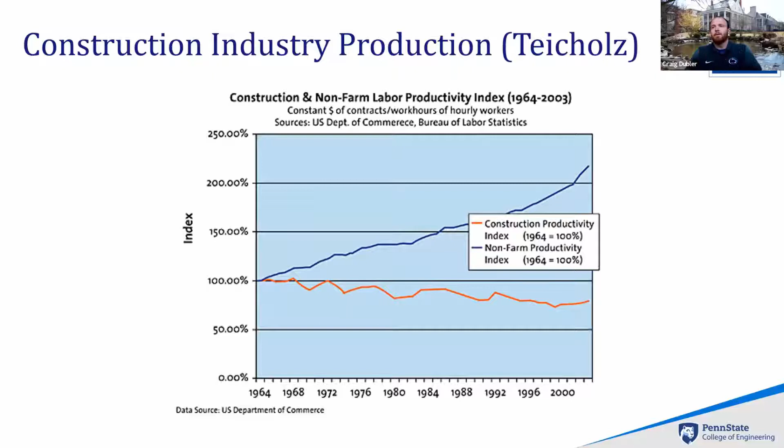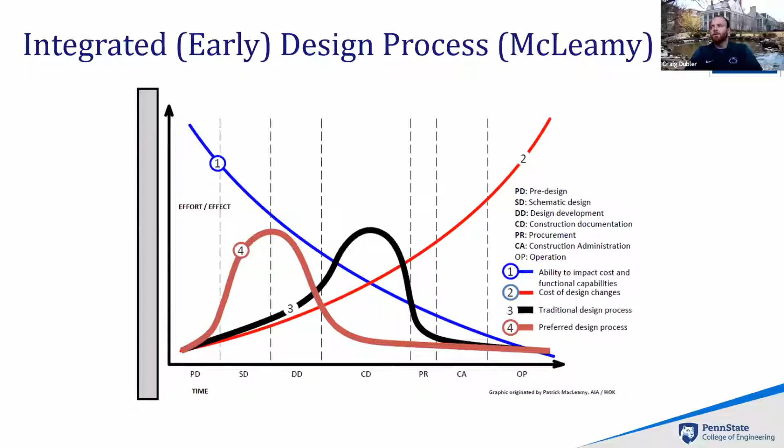So the final study I just want to chat about is NIST in 2004. They talked about the cost of interoperability, or just not sharing information on our projects. And that cost the industry an exorbitant amount of money, just us being siloed. This has really led to a lot of BIM research. I know at Penn State, we were able to get a pretty decent grant helping to try to solve this problem with interoperability, from the BIM execution planning guide.

At the same time, how can we do it from a Penn State owner perspective? So what is BIM for facility owners? I'm going to put my owner hat on. At Penn State, if I'm getting a project delivered to me, what do I expect? And believe it or not, I don't care a lot about the models.

Only where it adds value. So BIM to me is information management. How can I get the information I need to continue being successful in facilities, or maybe look at increasing my options, my interoperability, or information that is available to me, and take advantage of it. So what types of information are available to me as a facility manager slash owner?

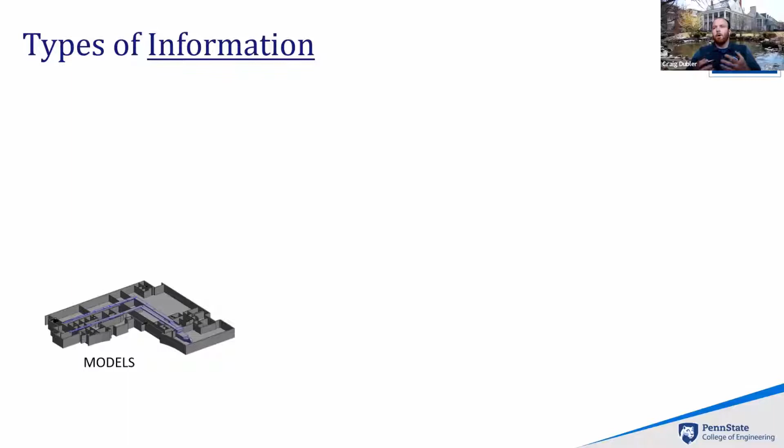Well, there are models, and there's a purpose for that. I'm not saying there's not a purpose, but sometimes we put a pretty good value to models where it might be too complex for some owners. It definitely provides wayfinding, or it provides where things are, or maybe components, as-built conditions, record model conditions. But there's also the most important thing to us, which is the data that comes out of that. I'm sure I'm not telling you anything you don't know, but that's what I tend to care about.

Okay, what can I pull from these models? What about that air handling unit is important for me to maintain it? What is important to me about the space where I can operate it? At the same time, over the building in general, where I can look at security, safety options.

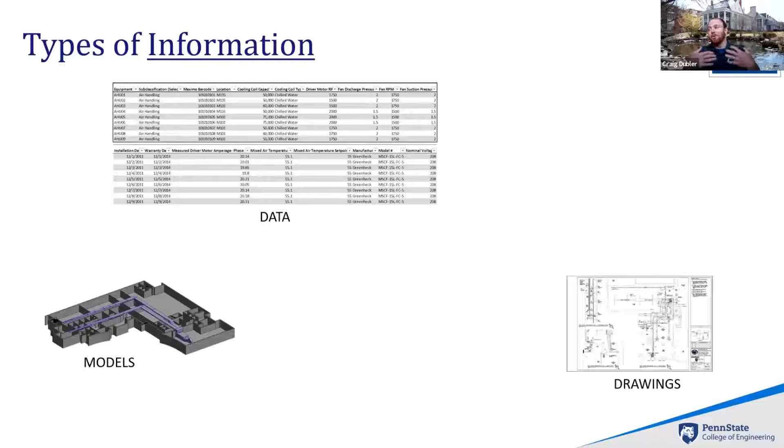We also have to pay homage to the stuff we forget about, right? There's still drawings, and we're still using drawings, so we can't forget that that's still important to a lot of owners. And I'd probably say just as important as data is documents. So I can do this export of a large amount of data, but if you give me an O&M document that has the information in it, and I can get that in the field to my technicians, that's extremely important. I just don't want to forget about that from a turnover standpoint.

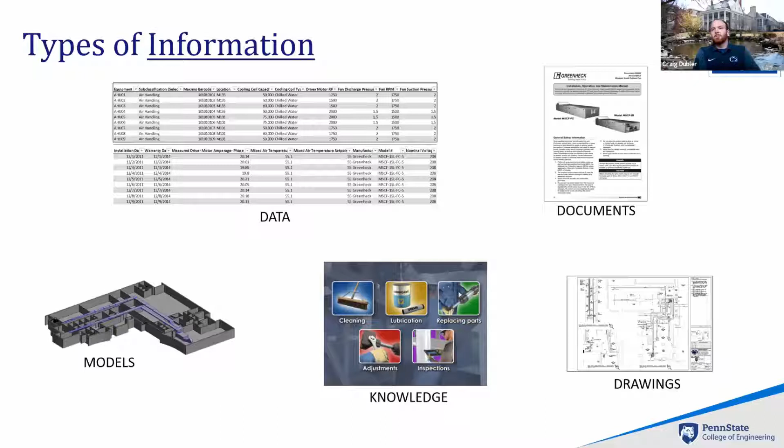Last but not least, it does get overlooked a lot, but there's so much knowledge that's produced on our design and construction projects that just doesn't get turned over. So how can we do that in a better fashion, where we take advantage of the vendors' and subcontractors' knowledge from an installation standpoint, and turn that over to the owner?

So I've presented this around the country, but it's the idea that I have for maximizing the benefits of BIM for FM. If every project knew this, and it didn't really matter what your owner was, if you just got to know your owner, what they cared about, and what you could do from a facilities management standpoint, these are kind of the keys that I came up with.

So first is begin with the end in mind. Just think about the owner, just get to understand them, what information they actually care about, how they want it delivered. Collaborate effectively, so actually come up with a plan to do that.

That plan will be extremely overwhelming at first, so have the ability to actually break down that plan and focus on key turnovers. I think that's kind of a missing part that we had when we put the BIM execution plan together at Penn State—it was overwhelming.

It was this 20-page document. Okay, we have a plan. But if you couldn't break it down and you couldn't actually deliver certain things, I think it got overwhelming, and it doesn't mean that you could actually execute that plan. So if you focus on turnovers, that's a key to execution.

So the idea of beginning with the end in mind—some questions to ask any owners, in my opinion, are: what's the purpose of the facility? Why is this even being built? Who's the stakeholders that are attached to this project?

Who's going to occupy, operate, and maintain? That may be one entity, that may be three entities, but there may be three people from a stakeholder perspective that are going to be requesting information at turnover.

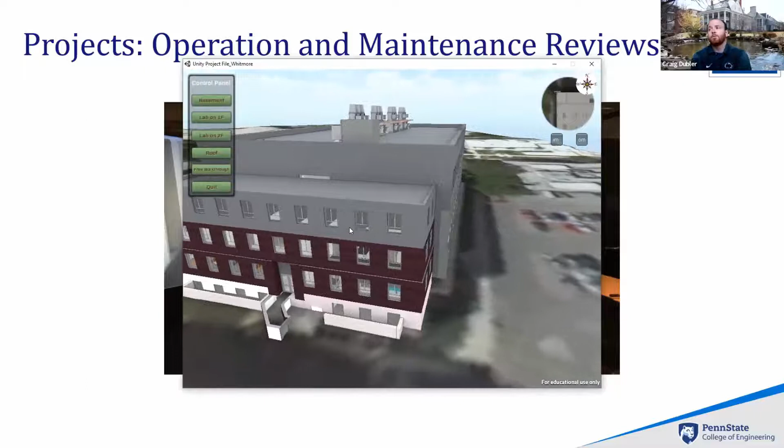This is our Whitmore project. We took a Revit model, exported it into Autodesk, and turned it into Unity. So we took it from Revit into Unity, and then basically put some displays on top of it, turning it into a Unity model that you could walk around.

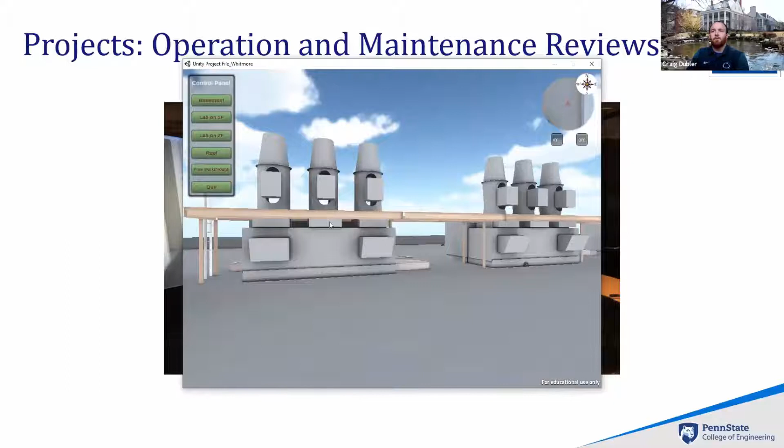So we could go on the roof, look at the height of our exhaust fans for this facility, and talk a lot about safety with our technicians to be able to access that space and maintain it.

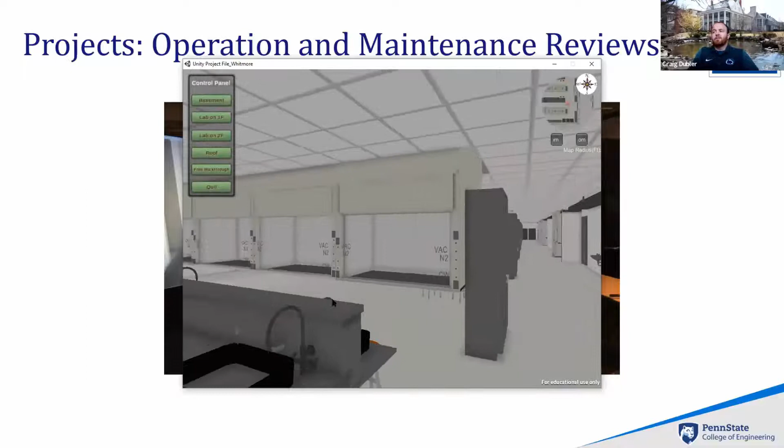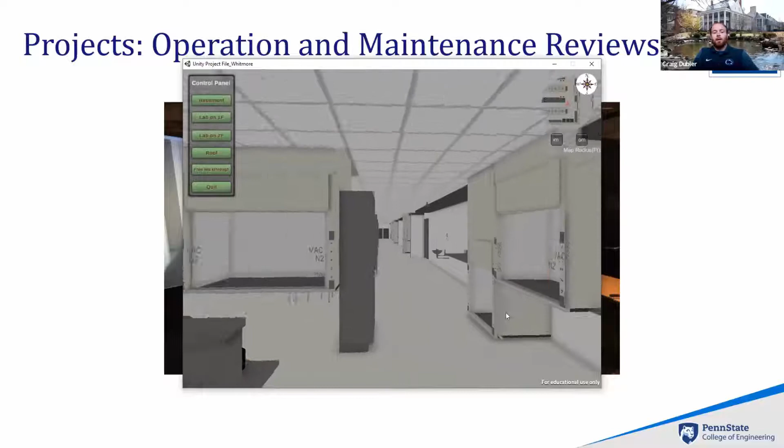We can go into a lab fairly quickly, and we learned, this is in design development, that this cabinet can't be here, and we may want to actually look at where this fume hood is located or relocate these fume hoods, because when the TA stands here, they have to watch potentially two different areas of students, so they can't see the whole way down the table.

So from a wayfinding perspective, we can see that.

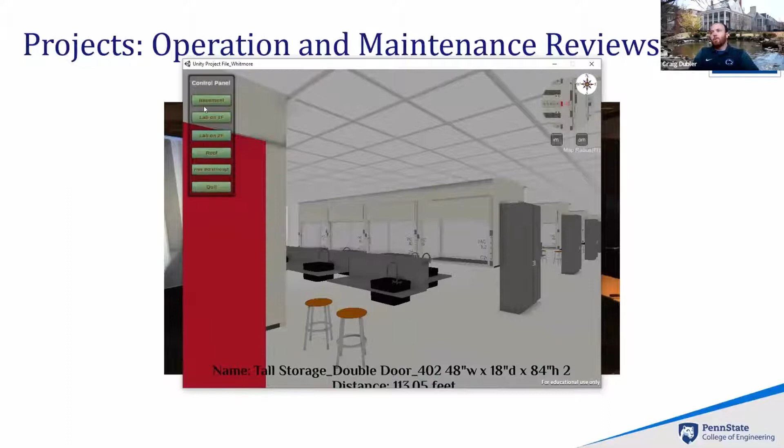We also look at the basement, and I don't know why we always put MEP spaces in the basement, but it just so happens. We could do a walkthrough of the basement and just look at where... sorry, it's been a while since I got to walk through this model, I lost my edge. But anyways, we can walk through the basement and get to see some parts and pieces that are important to the technicians.

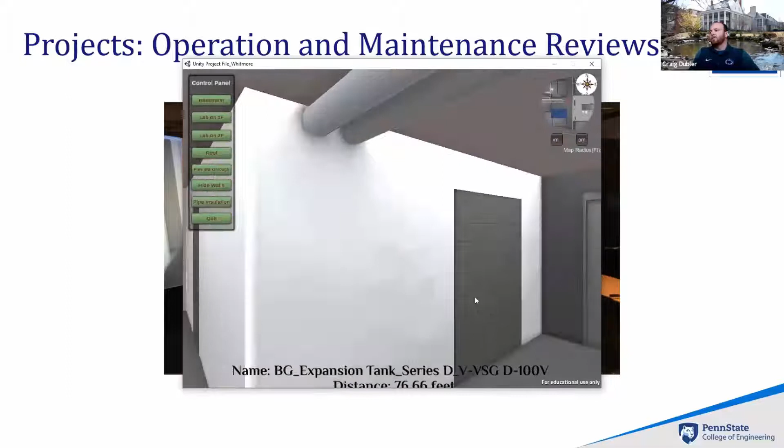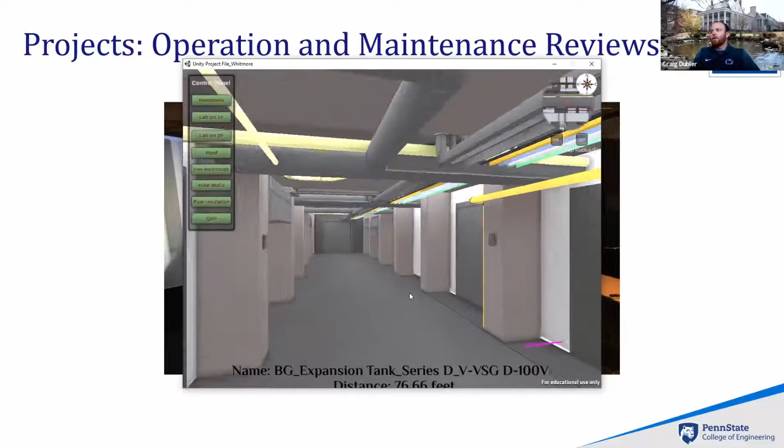We can see their rooms, what kind of equipment they have in their space, how the layout of the area is going to be, where they need to access and get through certain filter changes and equipment.

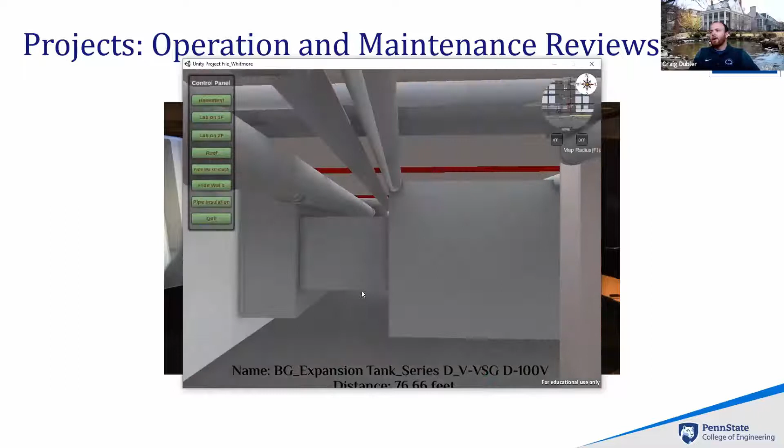This is an example of a heat exchanger, an air handling unit space with a heat exchanger. We have an avatar here where we can walk around and start looking at some ergonomic features to make sure that they're safe when they're doing their maintenance.

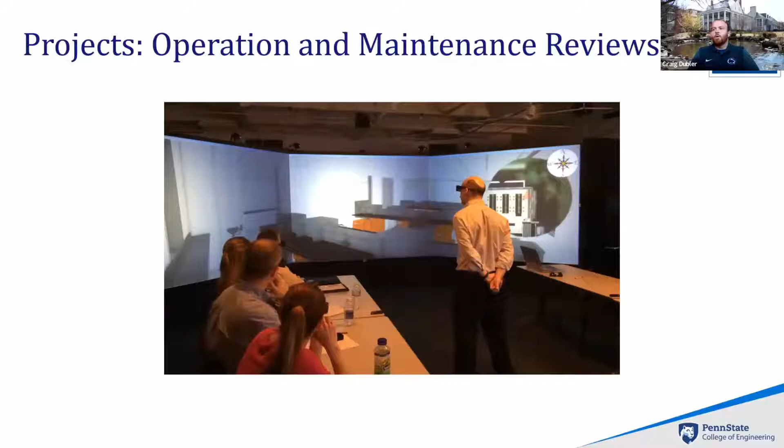And like I said before, we also kept the TA and the department head as part of these reviews, just so they could see what it takes to actually operate and maintain their facilities. I think they both learn a lot in these, we call them virtual walkthroughs, at schematic design, design development, and one prior to bid, just to make sure we captured all of the changes necessary.

This is a slideshow.

Keith asked about Unity. I'll send you a link to the Penn State script for how to take it from Revit to Unity. It's pretty much free to take it into Unity, and I can definitely share that link after this. It's fairly straightforward, depending what you want to do from a finishes perspective and a lighting perspective. You can spend a lot of time doing that, but if you're just looking at space and wayfinding, it's pretty quick.

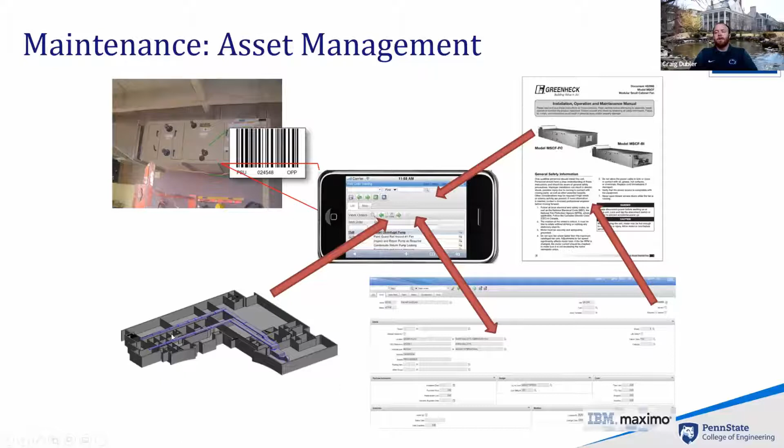to the model. So to get there, we had to obviously collaborate effectively. So each of our projects, we develop a BIM plan to make sure that happens. This is a 4-step process to develop a BIM plan.

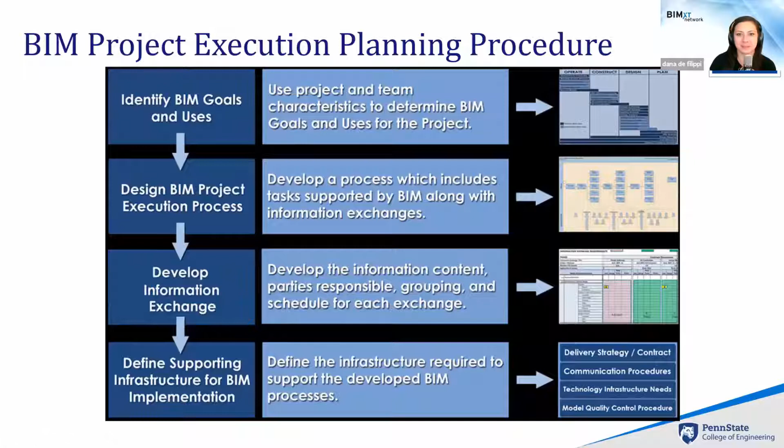I do strongly urge that each of your projects have a decent BIM plan. One, to determine what you're going to do on a project, but specifically what you're going to deliver at the end of the project. I think that's probably what most of us think about when we think about Penn State, right? Is the PXP or the BIM execution, the BEP, or whatever anybody wants to call it. I feel like whenever you look up BIM execution plan, you're going to find resources related to Penn State.

Yeah, that's exactly right. And we're always trying to sharpen that too. So if there's something you found with the BIM PXP that you like, or something you want changed, there's a website, bim.psu.edu. I have it in my references at the end. I would love to hear more collaboration on that, or things that we want to change with it, or some keys to success so we can make it better for the industry.

Thanks, Dana. And then finally, the key to success is focusing on turnovers. This is kind of exciting, at least to me. But once we found out that, okay, we know what data we want at the end of the day, and when we can put

together in Revit a list, or at least either families, common families for certain types of pieces of equipment, or we can just do shared parameters with different asset types. We can then deliver that and start requesting information at different phases of the project.

So when I say focus on deliverable, we just contractually obligate design entities at the end of the day to get to a certain amount of information or legacy information about that piece of equipment.

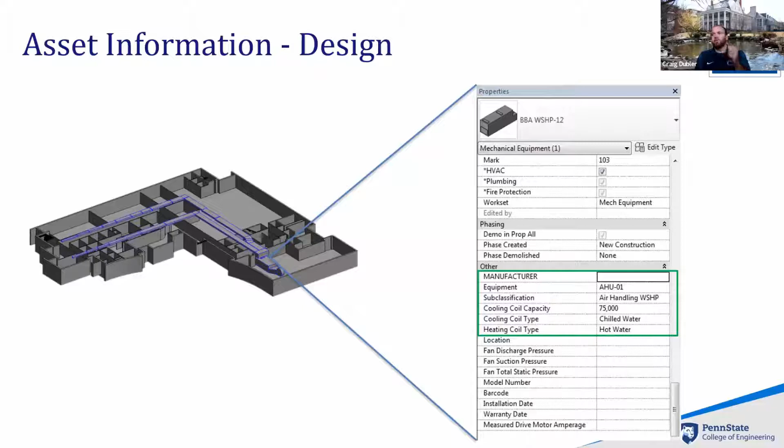And then design to construction, we determined, and this is a very difficult decision for us, but not to keep it in the model, but to pull it out in Excel, because it was easier for the contractors to not fill out Revit information in the field.

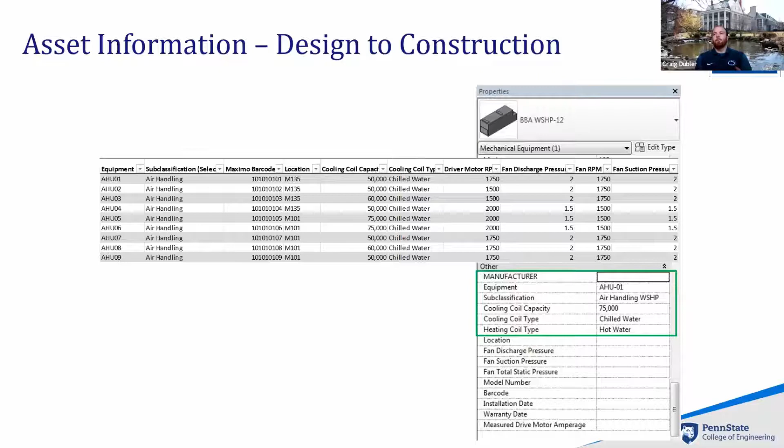It was easier to keep it in Excel where they could actually put construction information, so O&M information, or I'm sorry, submittal information, as well as installation information, barcode our equipment when it's being installed, and just completely filling this out for us when we're thinking about asset management.

And that was a big, tough thing for us, because we always wanted to stay in the model. We said the model is it, it's where it is, but at the end of the day, it didn't really matter if it was in Excel or it was in the model. It just mattered that we got it organized correctly and that the information was filled out the way we needed it. So once again, getting the owners what they need.

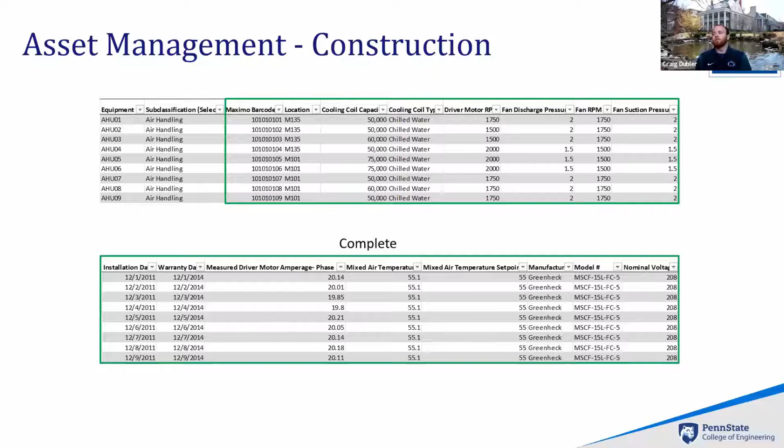And then we had to take that information and pull it into Maximo. So you might have heard of COBie. It would be great if COBie was aligned. And COBie is great, has opportunities, as well as, if the software is perfectly in line with the owner's recommendations.

If their owner's recommendation changes, or if the software may not accept COBie the way it's defined, you have to kind of do a manual manipulation of that data. So unfortunately we did, because a lot of our asset parameters were set up in a different way from a legacy perspective. So we kind of had to define our own information structure.

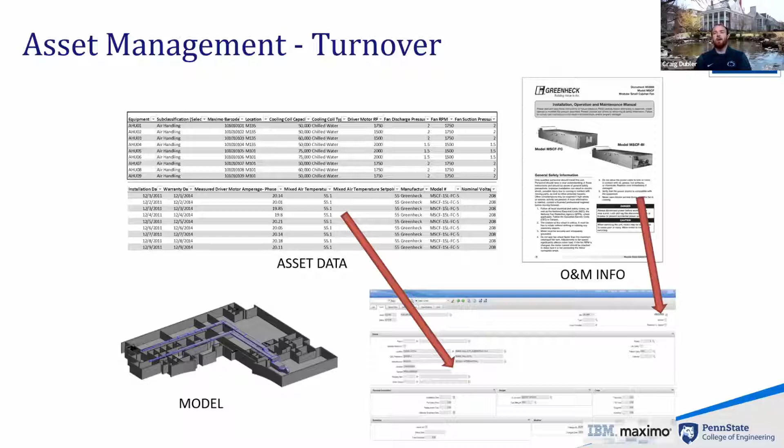But we take that data, import it into Maximo, attach O&M manuals, which is probably even more important than a lot of that data, and it gets maintained within Maximo from an asset management and a maintenance perspective. So that's kind of Penn State in a nutshell, what we're doing from BIM for FM.

Good question. Heather asked if I have any idea the percentage of responsibility of who's filling out that asset information. It's about 25% designer, 75% contractor. We also have the contractor validate the information that's in design through the submittal phase too, so that's part of the process.

So a lot of times it's the designer who's actually just putting the line item there, and then the contractor who's filling out the data. That's right. We ask the design team to fill out design intent information, capacities and things that really show why we're designing it, to the level of design intent. And then the contractors are filling out submittal and installation information. I'm trying to generalize a little bit.